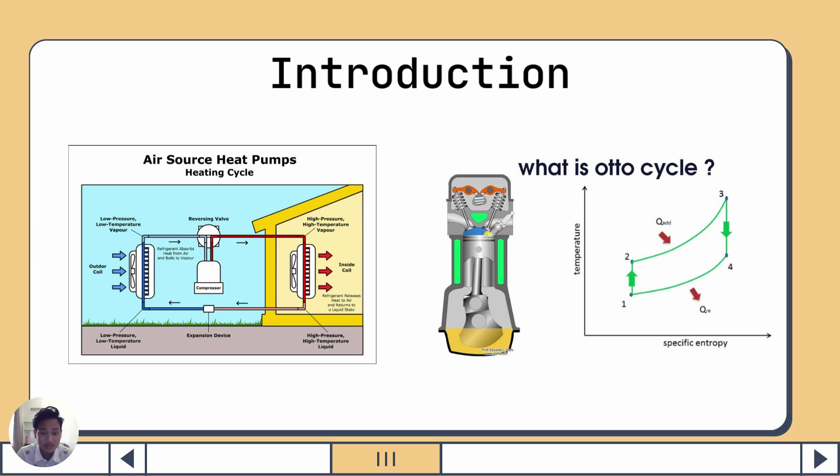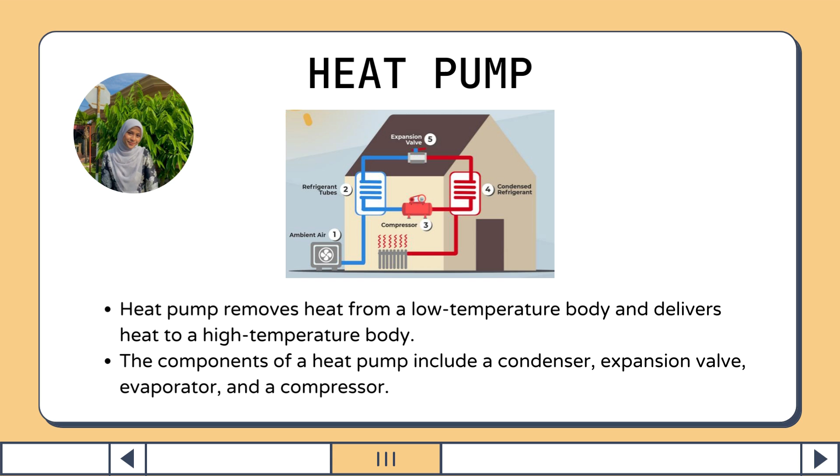I will present about the heat pump. Heat pump removes heat from a low temperature body and delivers heat to a high temperature body. To accomplish this energy transfer, the heat pump receives external energy in the form of work or heat from the surroundings. The components of a heat pump include a condenser, expansion valve, evaporator, and a compressor.

Have you ever wondered how a heater produces warm air? For the first step, the pump transfers heat to the working fluid in the evaporator and uses the cold air outside to turn it into a gas. Then, the compressor is able to increase the temperature and pressure of the gas.

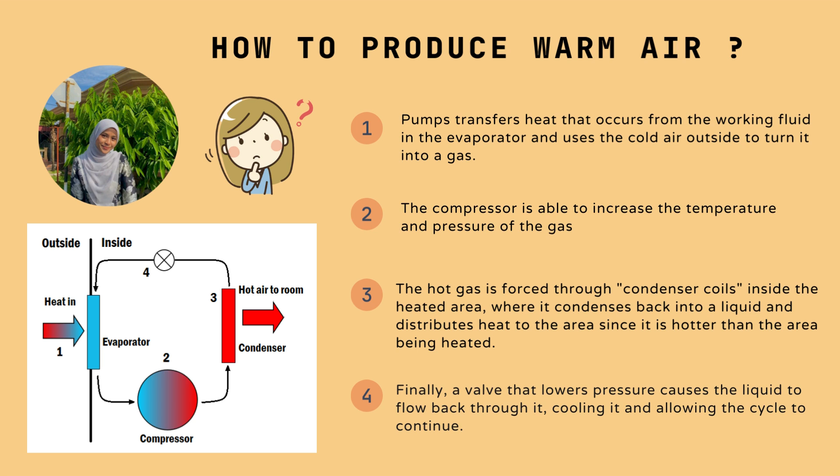Then, the hot gas is forced through the condenser coil inside the heated area, where it condenses back into a liquid and distributes heat to the area since it is hotter than the area being heated. Finally, a valve that lowers pressure causes the liquid to flow back through it, cooling it and allowing the cycle to continue.

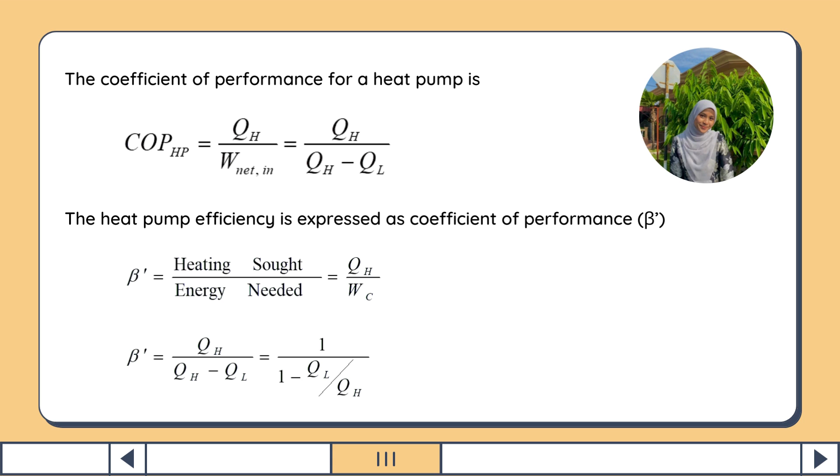Okay, so for the calculation of a single unit, a steam power plant produces 50 megawatt of net work while burning fuel to produce 150 megawatt of heat energy at a high temperature. So, to determine the cycle thermal efficiency and the heat rejected by the cycle to the surroundings, we must use the formula given to us through the application.

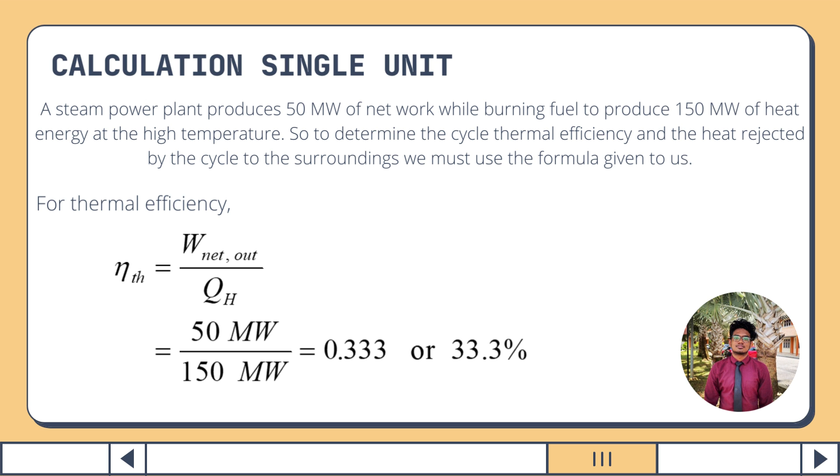So, firstly, for the thermal efficiency, we must use the formula of efficiency, which is the W net out over QH. So 50 megawatt over 150 megawatt equals 0.33 or 33%. So the efficiency of this steam power plant is 33%.

Then, to find the heat rejected by the cycle, we must use the formula W net out equals QH minus QL, and QL is the heat rejected. So QL equals QH minus W net out, which is 150 megawatt minus 50 megawatt. And we get the final answer of the heat rejected equals 100 megawatt.

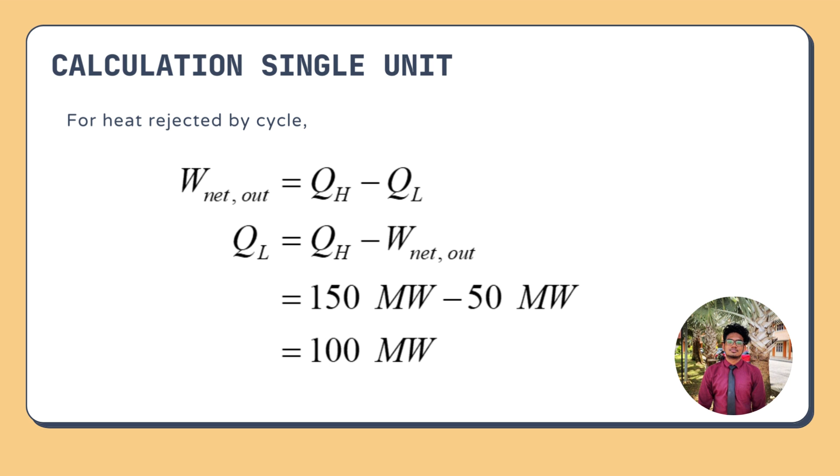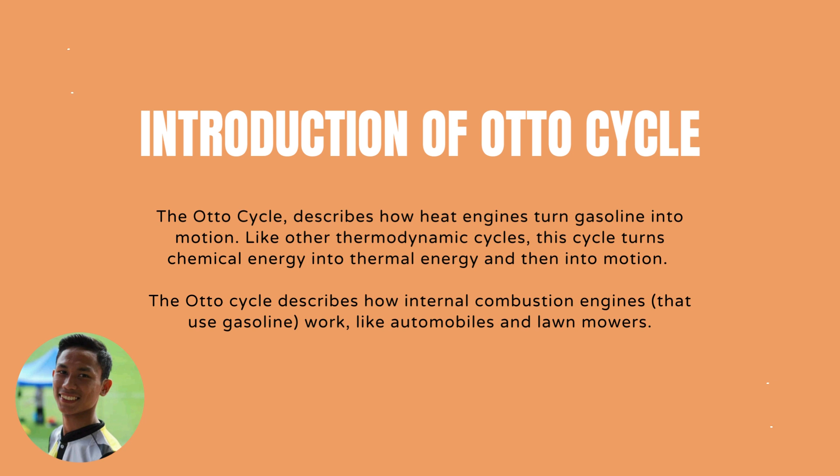Hi everyone, welcome to introduction of Otto cycle. The Otto cycle describes how heat engines turn gasoline into motion. Like other thermodynamic cycles, the cycle turns chemical energy into thermal energy and then into motion.

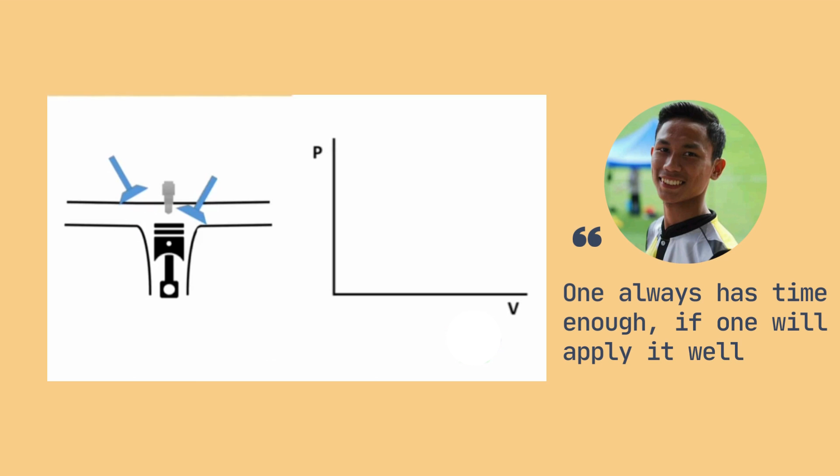So now I will explain about the 4-stroke engine. The stroke refers to the full travel of the piston along the cylinder in either direction. When the intake valve is open, and this is what we call the intake stroke, the piston travels downward from top dead center to bottom dead center to draw the air and gasoline mixture into the cylinder. So as you can see, the volume increases.

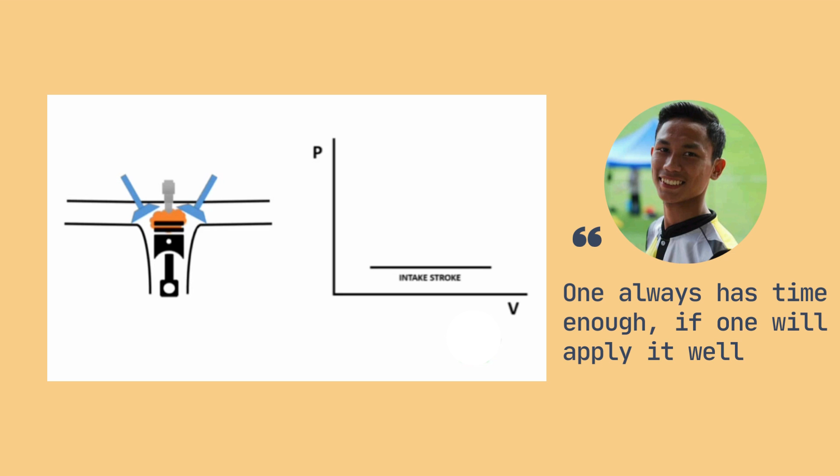Next is the second stroke. The piston travels upward to compress the air and gasoline to make it a combustible mixture. Since this is the compression, as you can see, the volume clearly decreases and the pressure increases. This is called the compression stroke.

Before moving to the third stroke, we need something to give us power, and that is where combustion comes in. Here the spark plug ignites and provides heat to the fuel and oxygen, which produces combustion. The combustion is what we call the heat addition to our engine, and of course the pressure increases.

Now we can move to the third stroke by utilizing that heat energy from the combustion. Here the pressure decreases and the volume increases, and this stroke is what we call the power stroke. It's called the power stroke as this is the power that moves your car and keeps the cycle going around. Now after using the air and fuel mixture, the waste heat needs to be evacuated.

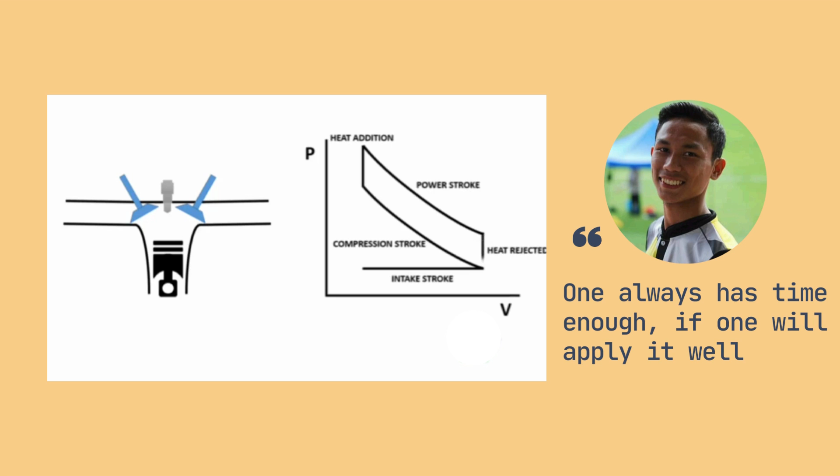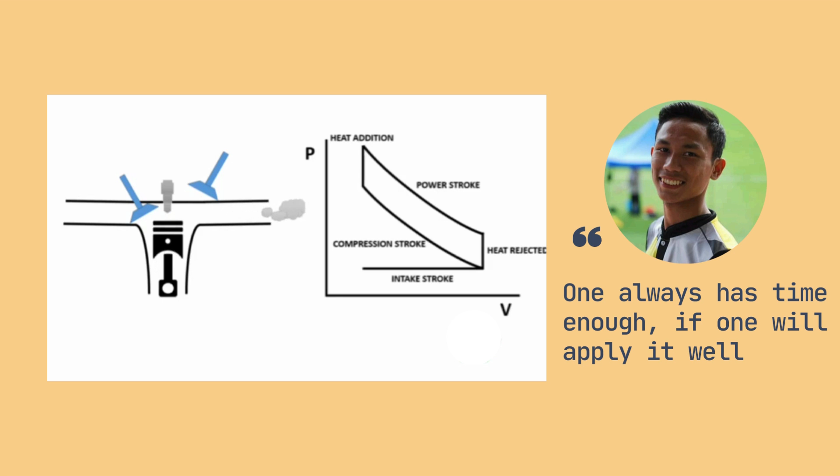This is what we call the heat rejection of our engine. The exhaust valve is open to assist evacuation of the waste gases from the cylinder, making the pressure decrease. And finally, the last stroke is used as we need something to evacuate the waste out. The piston travels upward to push out the waste gases, and this is what we call the exhaust stroke.

In general, the thermal efficiency (ηth) of any heat engine is defined as the ratio of the work to the heat input at the high temperature. Since energy is conserved according to the first law of thermodynamics and energy cannot be converted to work completely, the heat input must equal the work done plus the heat that must be dissipated as waste heat into the environment. Therefore, we can rewrite the formula for thermal efficiency as ηth = W/QH = (QH − QC)/QH = 1 − QC/QH.

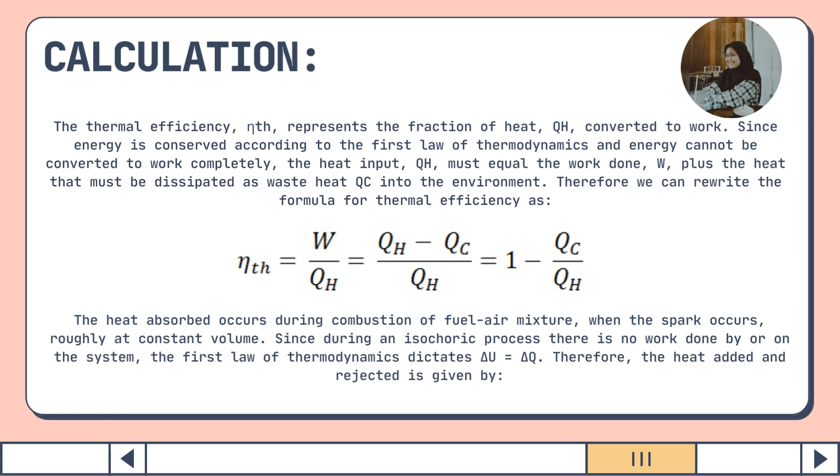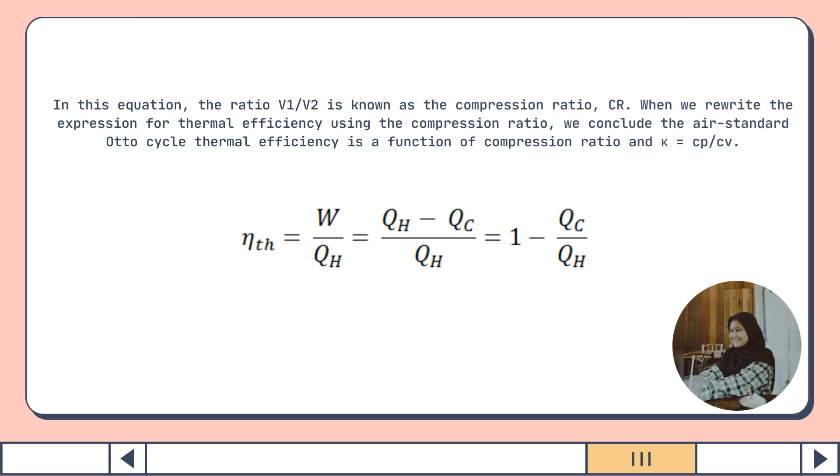Lastly, when we rewrite the expression for thermal efficiency using the compression ratio, we conclude the air standard Otto cycle thermal efficiency is a function of compression ratio and k = Cp/Cv. And lastly, the equation we got is ηth = W/QH = (QH − QC)/QH = 1 − QC/QH.

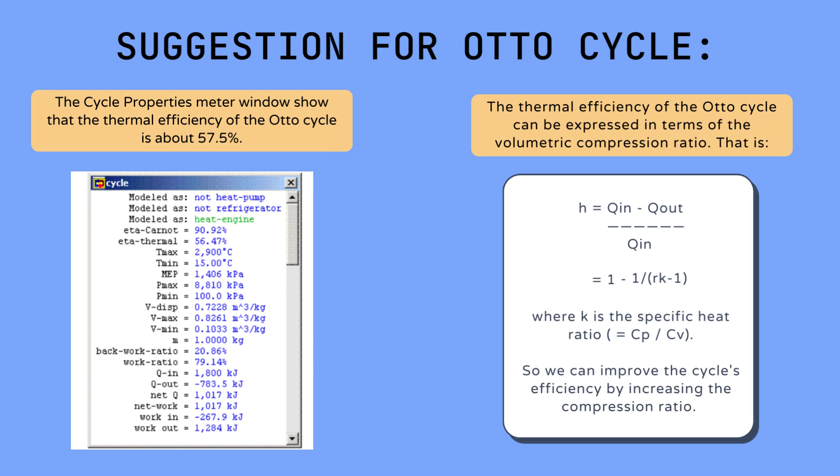These cycles are ideal cycles for every type of combustion engine. As the Otto cycle is an ideal cycle for petrol and gas engines, similarly, there is another ideal cycle for diesel engines too. Even though the Otto cycle is ideal, it cannot achieve the maximum efficiency, but we can increase the efficiency of the cycle with a few methods.